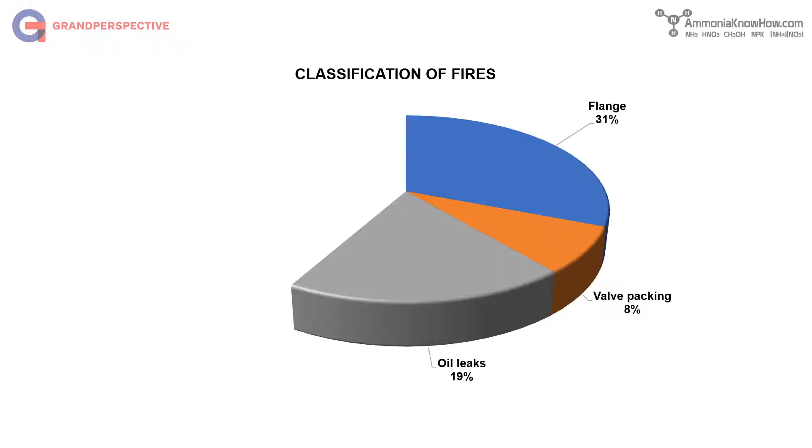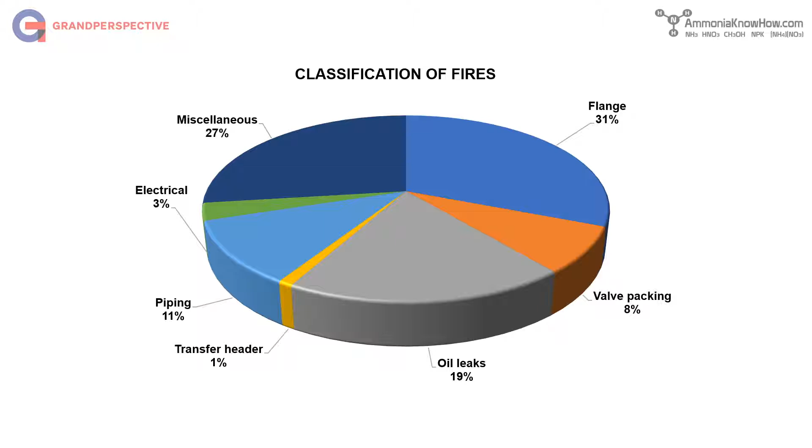One of the major risks in ammonia plants is the risk of fire caused by gas leaks. In some cases, explosions occur, and from those cases, the hydrogen-rich gases, mainly synthesis gas, are the main reason. The most common fires in ammonia plants are either from flange leaks, where hydrogen-rich gas catches fire, or from oil leaks associated with compressor and lube oil pump and seal oil systems.

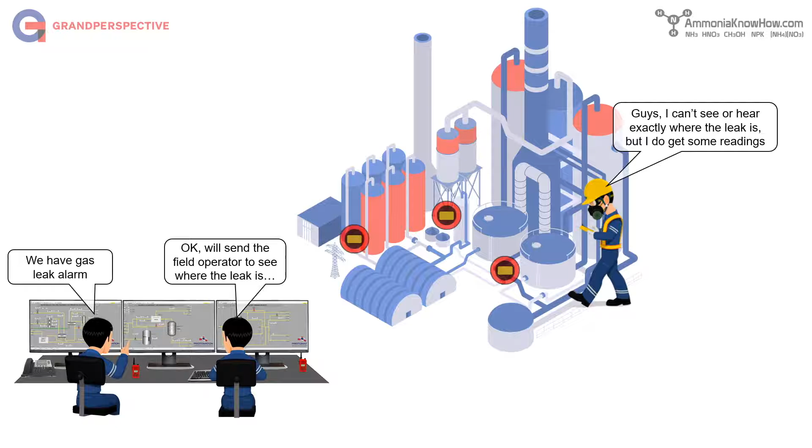At present moment, a significant number of plant operators need to decide based on the sparse information coming from gas sensors, which do not always reflect the reality in the field. An analysis of the offshore hydrocarbons release database by the Health and Safety Executive reveals that approximately 36% of major gas leaks and 69% of significant gas releases were undetected by gas detectors.

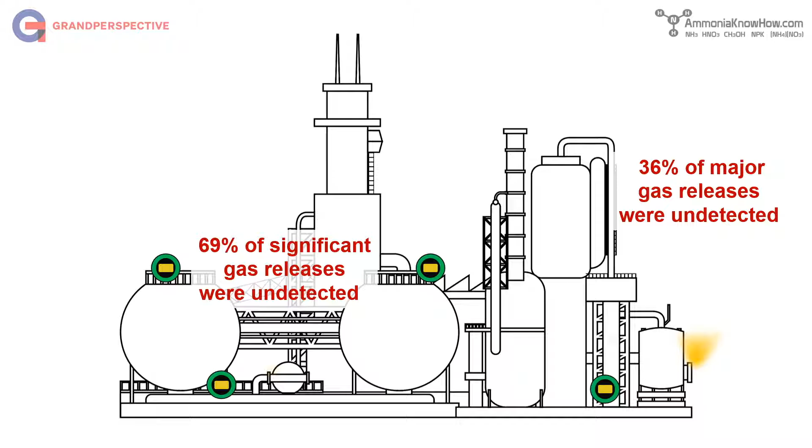The decision process for or against an expensive intervention in an uncertain risk situation involves the danger to act with too little, too late. Statistics say the accuracy of detection systems is not always reliable, and so many leaks go undetected. Why? Well, a gas sensor only picks up the gas when it is slap bang in the plume. Once it is off the center of the plume by just a few meters, the concentration measurement gives you an entirely wrong picture of the situation at hand.

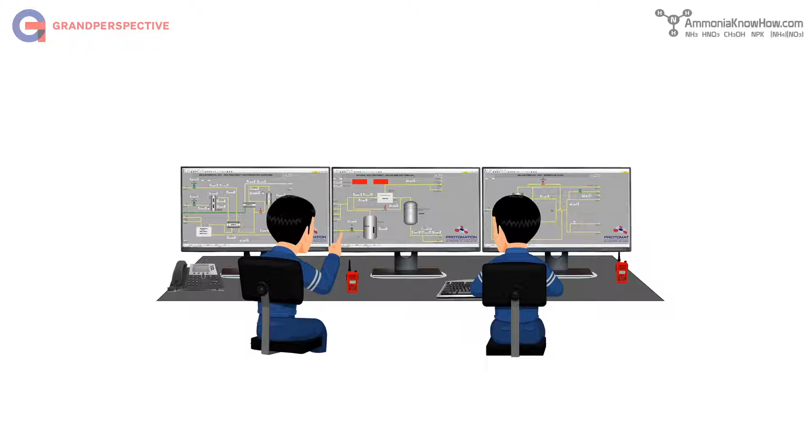Imagine this. During a normal routine shift, the leak detection system triggers an alarm in the DCS. What is the next set of maneuvers? Most probably, the DCS operators send the field operator or firefighter with a portable sensor to check for the leak. First question that goes to his mind: is this leak real or just another false alarm?

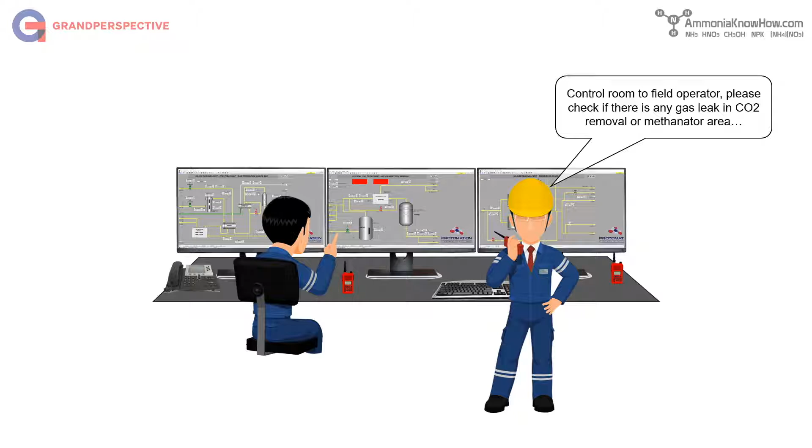Then, if the leak is real, how big is the leak? Does my interpretation of the situation result in a shutdown of the plant right now? Or if the leak is small, can we still run the plant to meet the production target? Or at least until those spare parts will arrive, so we can fix more problems at once if we stop the plant?

Now let's suppose the gas leak is real. The leak detection system picks it up correctly and indicates a problem. A gas cloud is dispersed through the plant, influenced by the leak location, the hole size and orientation, pressure, piping congestion, and, of course, the wind direction.

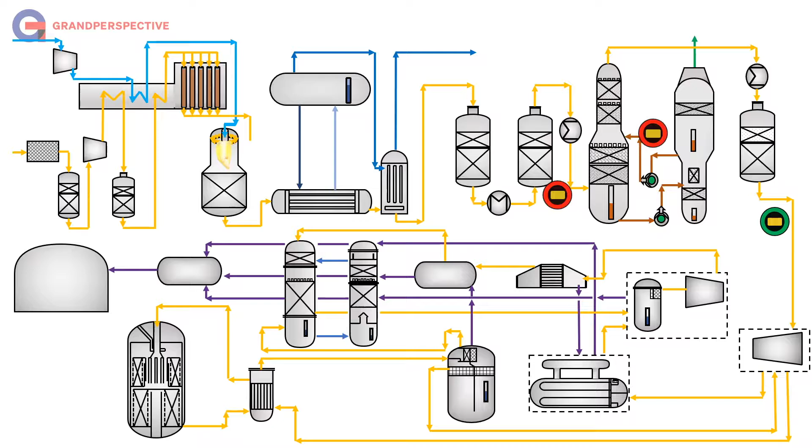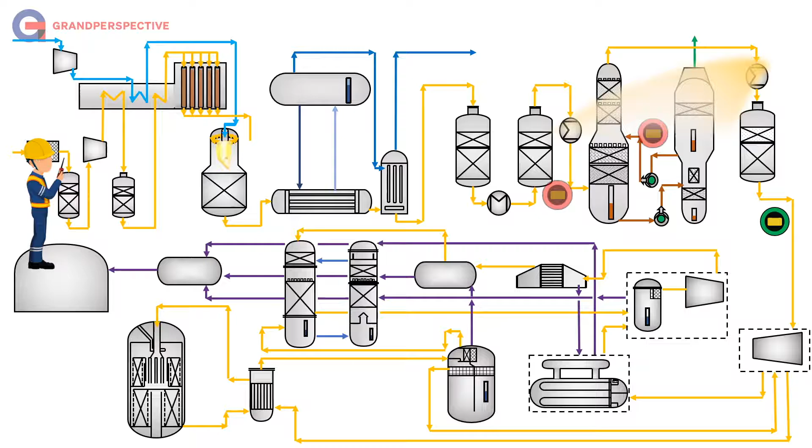Once the field operator is going to check for the leak, another question will arise. Where exactly is the leak? How big is the flammable volume of the gas cloud? How can we prevent the operator from entering the gas cloud during his checks? Will the windsock check be enough to assume that the approach is correct? And the operator will not enter the gas cloud that will engulf him in a ball of fire in case of ignition?

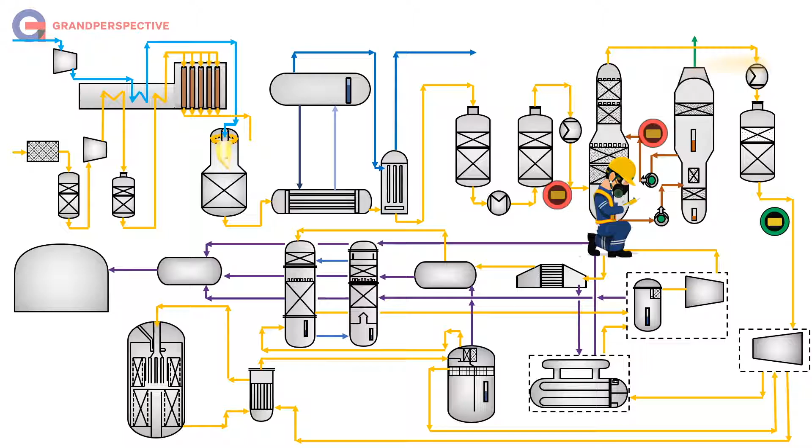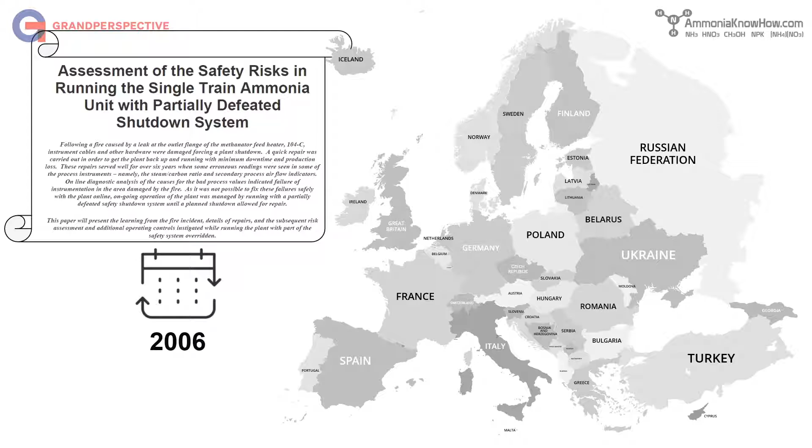Now let's have a look at a study of a real case that happened in an ammonia plant in Europe. In December 2006, during normal operation of the ammonia plant at a production rate of 100%, the DCS operator received an activation of the low temperature alarm on the outlet of 104C heat exchanger. In normal operation, this temperature remains around 335 degrees Celsius, or roughly 600 degrees Fahrenheit. The recorded temperature value at this time was 147 degrees Celsius, or just below 300 degrees Fahrenheit.

The next disturbance was a low pressure alarm at PRC 176, which controls the inlet pressure to the low pressure stage of the synthesis compressor 103J. The two alarm values gave warning to the operators to check the situation in the field. In the field, a high-intensity fire at the outlet flange of the methanator feed heater was observed. The flame was directed at the 16-inch pipeline methanator feed inlet. This line is responsible for directing the synthesis gas to the methanator via the control valve.

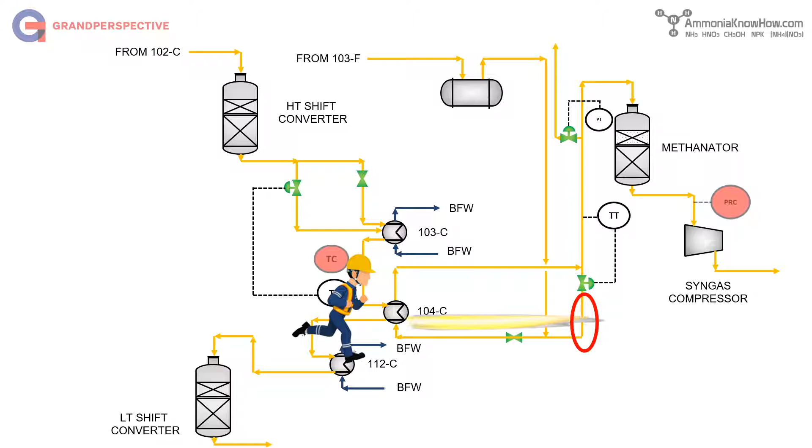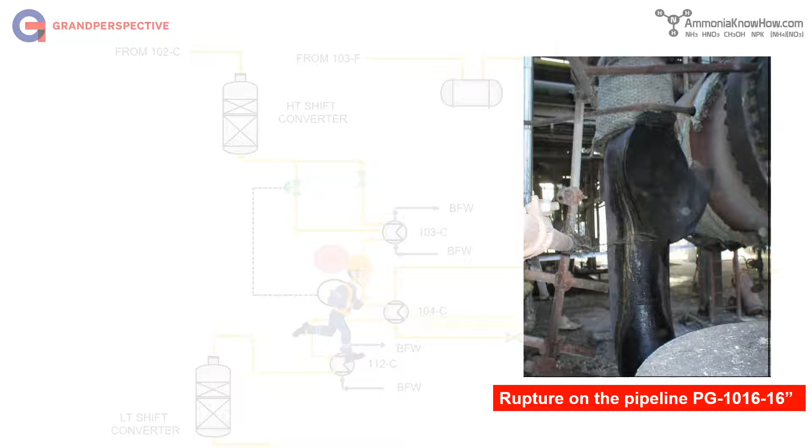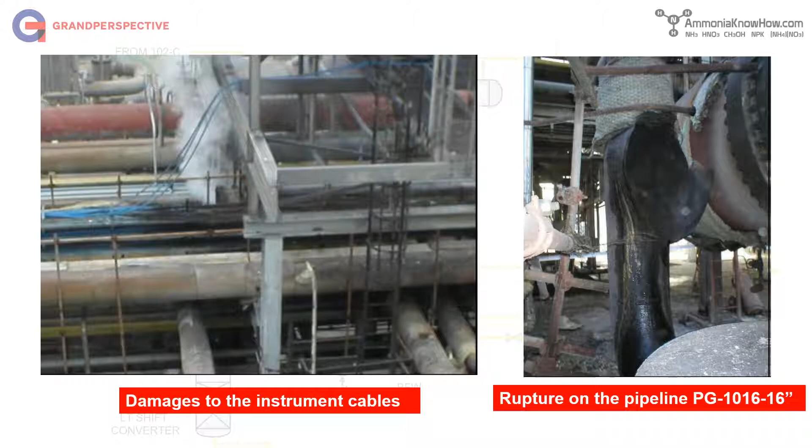Trip procedures of the entire unit were initiated, but after 3 minutes from the first alarm, the fire caused the pipe to fail from overheating. The moment the failure occurred, a massive pressure drop in the whole system was indicated at PRC 143. The entire front-end gas, approximately 280,000 normal cubic meters per hour at 27 bar and 335 degrees Celsius, was immediately ignited at rupture point. The burning cloud caused extensive damage to the instrument cables and accompanying instruments due to their close vicinity to the main supporting structure. Luckily, during the incident no operators were in the field, which prevented any injuries to personnel.

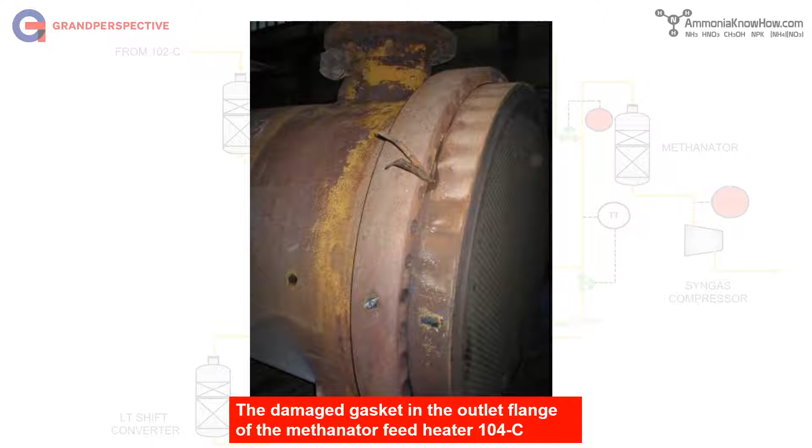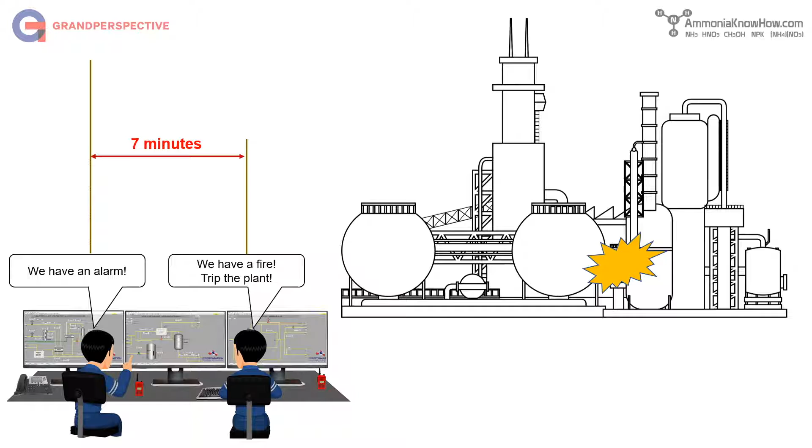Overheating of the instrument cables caused a total breakdown in communication between the instruments in the process field and the DCS system. Operators lost all ability to control the process. With the rapid intervention of the safety emergency shutdown valves and by closing the blocking manual hand valves to the main process streams, the process flow to the rupture was isolated and the fire extinguished. The duration of the incident from the appearance of the first alarm to the complete trip of the whole unit was 7 minutes. The consequential fire was extinguished within 12 minutes of the first alarm.

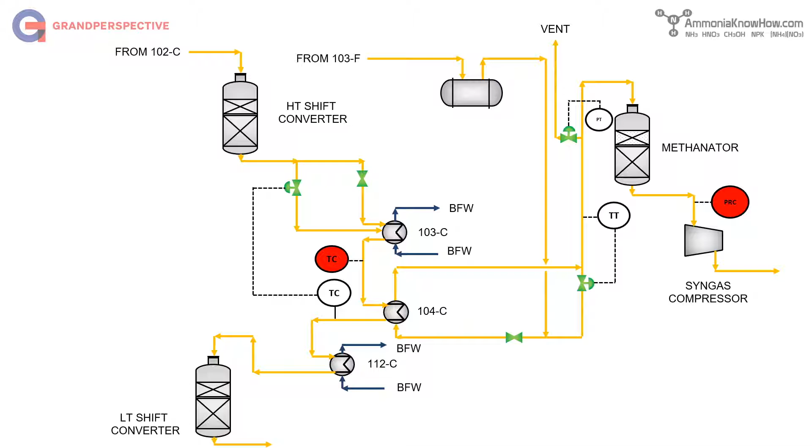In this case, the DCS operators did not receive a gas leak detection alarm. They only understood that they have a problem once they got main process parameters variation, and it was already too late to stop the gas leak. The gas cloud resulting from the leak was already ignited and impinged on the 16-inch pipeline methanator feed inlet, which led to the rupture. That means the gas leak was there longer than the operators realized.

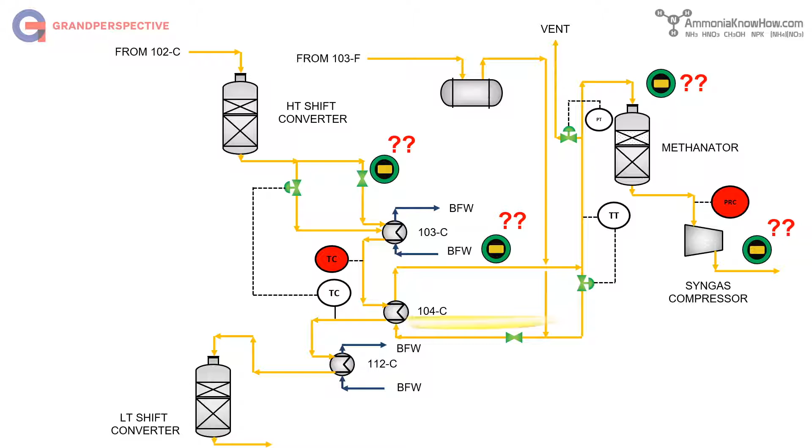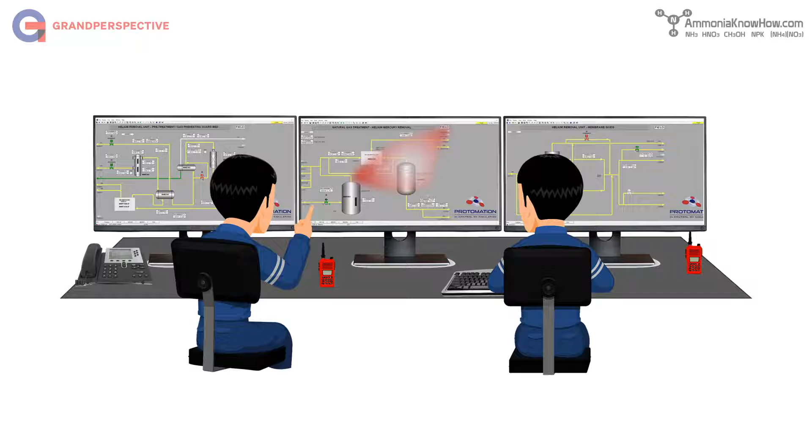Now imagine if they could detect the leak from the early phase. If they could not only detect but visually see the leak from the moment it started. They could see the exact location, the size, the direction of the gas cloud. They could estimate the risk and would definitely have plenty of time to react and control the issue and stop the plant in safe conditions, preventing costs associated with extensive loss of production and with the repair work resulting from the damages.

As mentioned before, existing gas detection systems are not 100% reliable and are influenced by the following factors: leak location, the hole size and orientation, gas pressure, piping congestion in the area, and the wind direction. Traditional emergency response training tells us that in case of an ammonia leak, the assembly point where you have to go will depend on the wind direction, and the announcement will tell you exactly which assembly point you have to go to. But is this empirical way of selecting the assembly point enough nowadays?

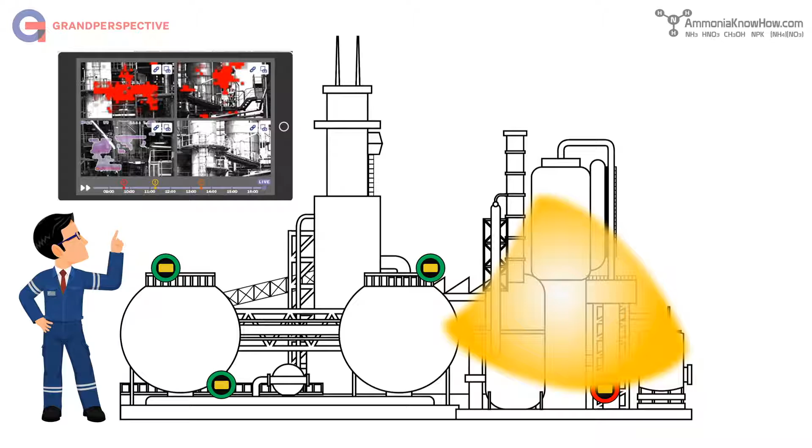For those caught in an ammonia cloud, the suffocating sensation and the panic that gets installed once you feel you cannot breathe is a forever living memory. As you move through the cloud trying to get out, you cannot stop thinking, how big is this cloud? Would I ever get out of this? There is the need for an additional layer of protection that would give the operators an edge over the invisible gas cloud. Situation assessment just means overview.

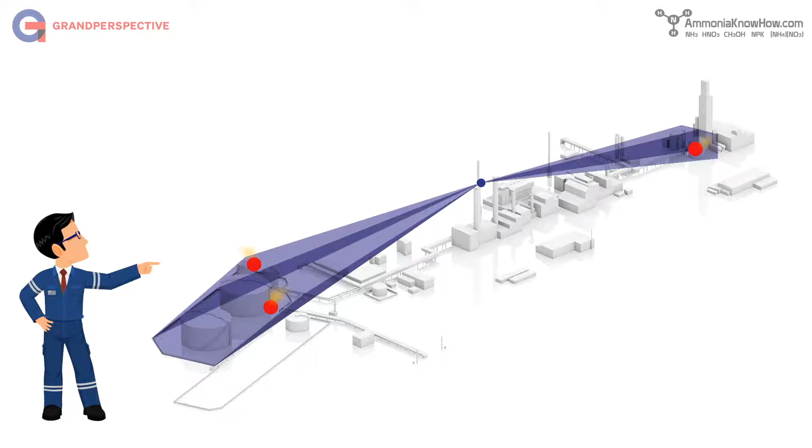We want to introduce an entirely new way of detecting hazardous gas clouds no matter where they are and what the gas is. Grandperspective provides, with the Scanfield early warning solution, a remote monitoring tool that detects gas clouds optically from kilometers away. Grandperspective developed the new early warning solution, the Scanfield. This is the recording of a release experiment that was conducted with a harmless release of ammonia water to simulate an ammonia gas leak.

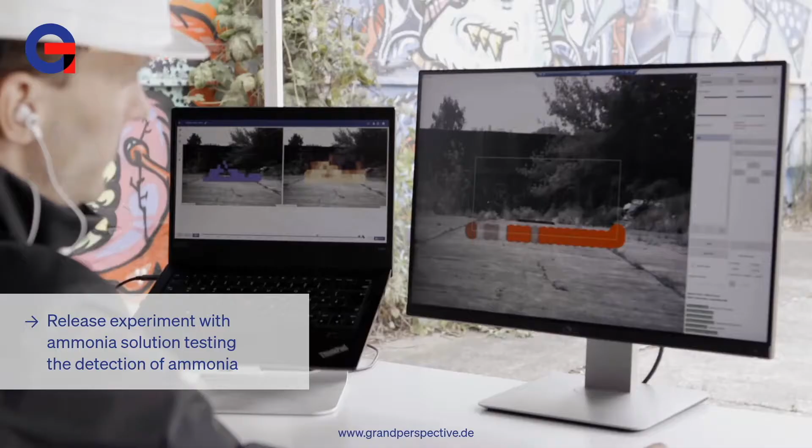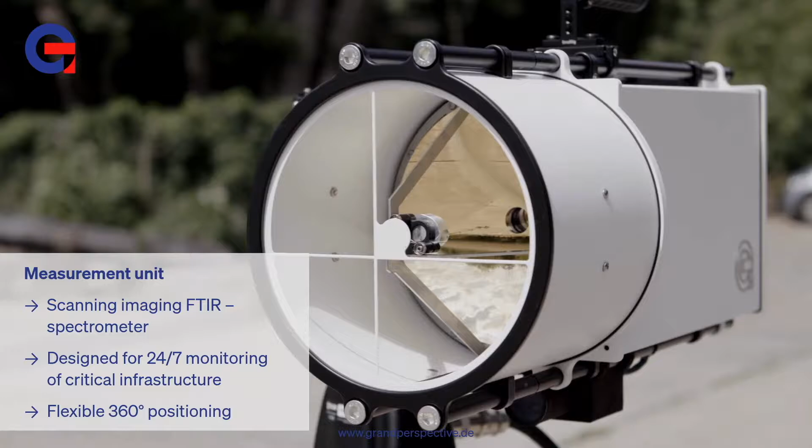The Scanfeld measurement unit moves and picks up the signal of the gas. In the control room, the operators instantly see the gas cloud distribution. The Scanfeld measurement unit uses Fourier transform infrared spectroscopy for chemical identification and the assessment of the entire gas cloud. The optical measurement technology works at kilometers distance and identifies the chemical composition of the gas cloud for hundreds of different chemicals.

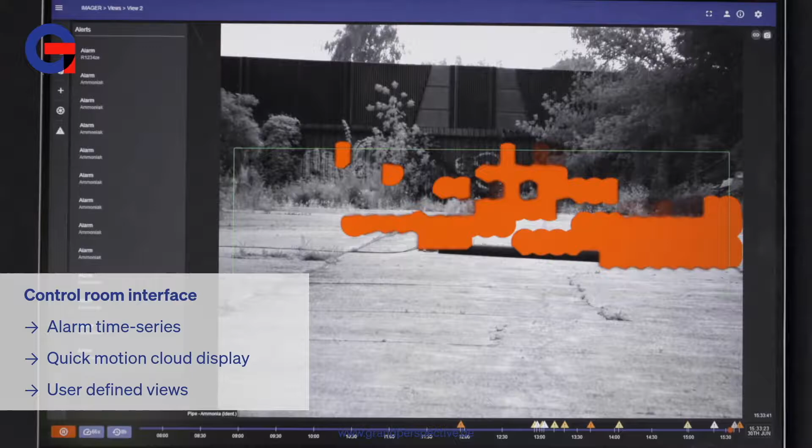You can build up a monitoring solution to cover entire chemical plants by combining an arbitrary number of Scanfeld measurement units with our software modules for chemical identification and cloud visualization, automatic incident classification in warning levels, and live gas cloud tracking and hazard zone mapping. Situation assessment is visualized in an intuitive gas cloud display with alarm logging and an interface to the DCS. On any device, including handhelds, the user can assess the present situation as easily as all prior events.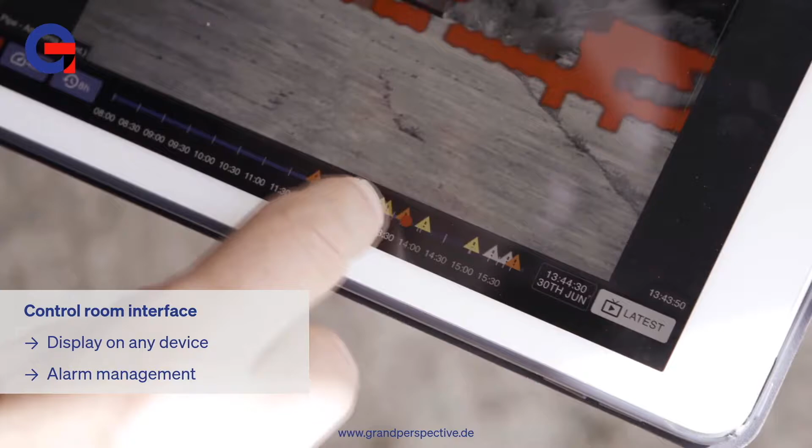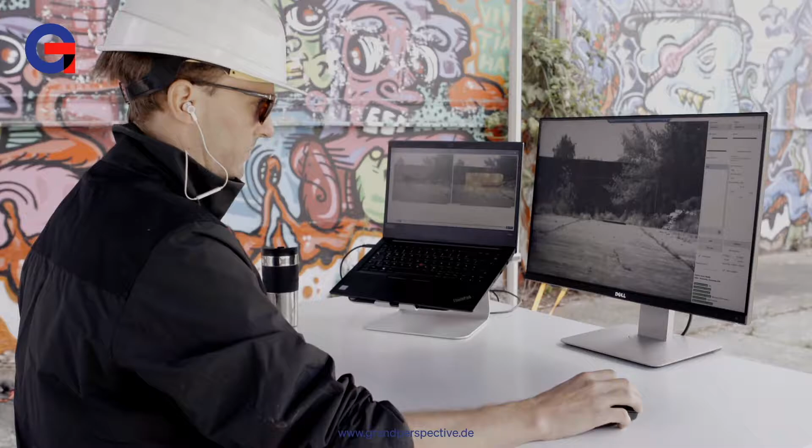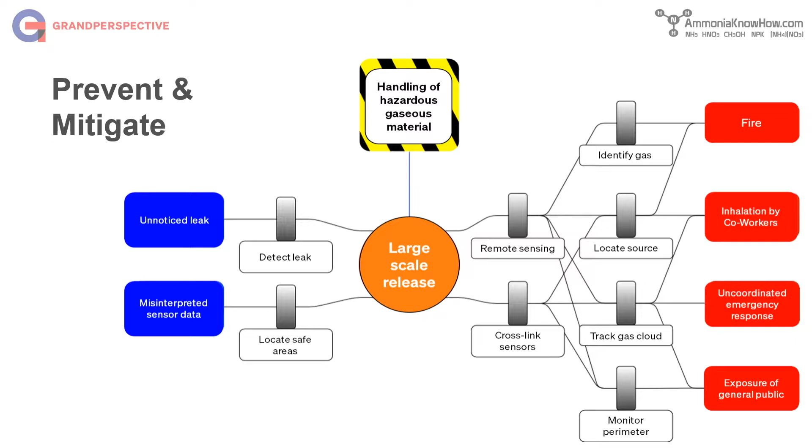The Scanfeld early warning solution provides answers to the questions of where is how much of which hazardous gas. The Scanfeld early warning solution brings in a series of mitigation barriers that can prevent major consequences. Using remote sensing in combination with cross-link sensors, Scanfeld can detect the leak, identify the chemical, locate the leak source, and perform cloud tracking and perimeter monitoring, preventing major consequences like fire, inhalation by co-workers, uncoordinated emergency response, and exposure of the general public.

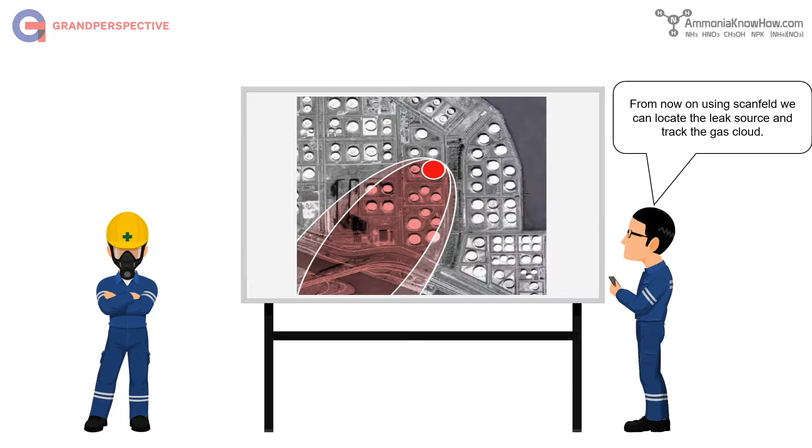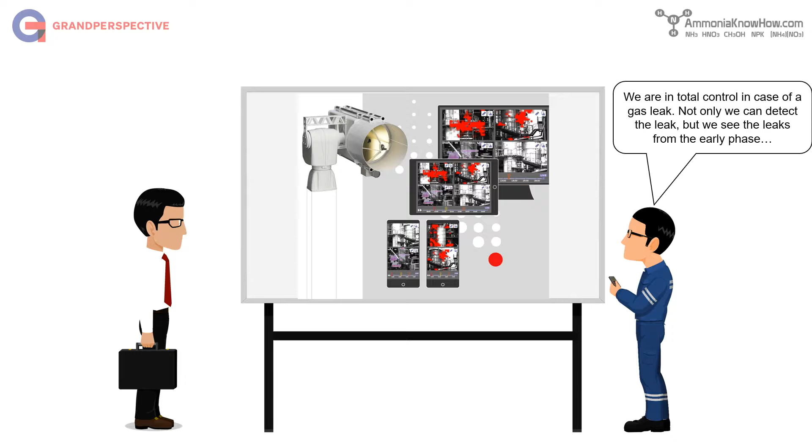Given the limited potential for passive and constructive protection improvement, insurance companies and auditors are stipulating higher standards for early warning systems. The Scanfeld early warning solution provides an answer. Huge areas that were not monitored before can now be under 24/7 surveillance, sometimes even with a single remote sensing unit.

In this webinar, we have shown how gas leak detection at an early stage is vital for hazard prevention and rapid incident mitigation. By today's standards, operators have to make their decisions based on sparse information of gas sensors. This involves the danger to act with too little, too late. Remember that over 30% of all major gas leaks are undetected by gas sensors. Early warning by remote monitoring closes the gap and provides the necessary overview.

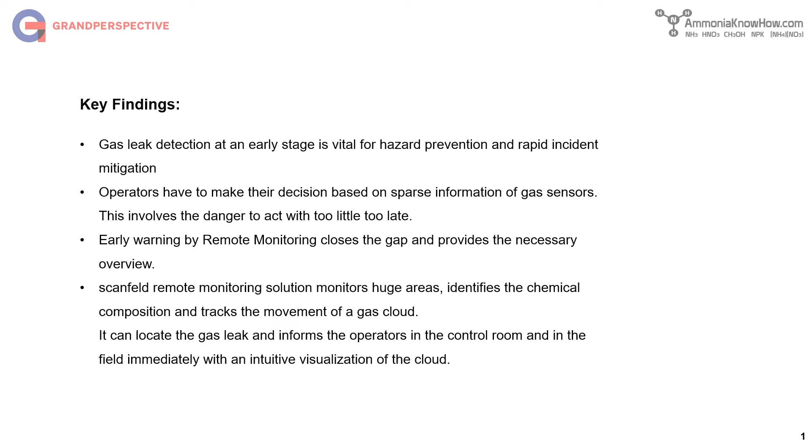We introduced the Scanfeld remote monitoring solution that monitors huge areas, identifies the chemical composition and tracks the movement of a gas cloud. It can locate the gas leak and informs the operators in the control room and in the field immediately with an intuitive visualization of the cloud.